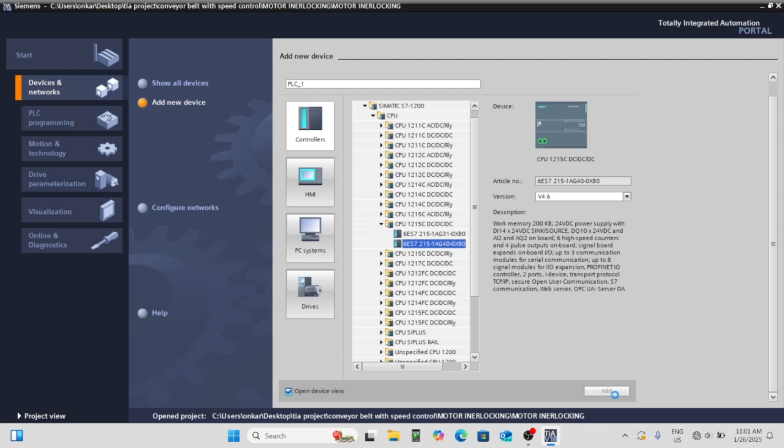After adding the PLC, make sure to set up the security configuration to ensure proper operation and safety. Next, add a new HMI screen to the project and establish a connection between the HMI and the PLC by configuring the communication settings.

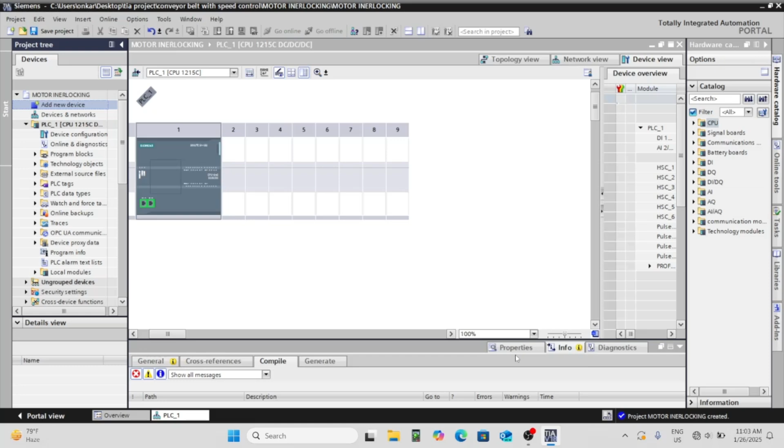Now go to the default tag table, where we'll create the necessary tags. Add tags for inputs like Start Motor 1, Stop Motor 1, Start Motor 2, and Stop Motor 2. For outputs, create tags for Motor 1 and Motor 2. With the tags created, navigate to the OB1 file, where we'll design the ladder logic.

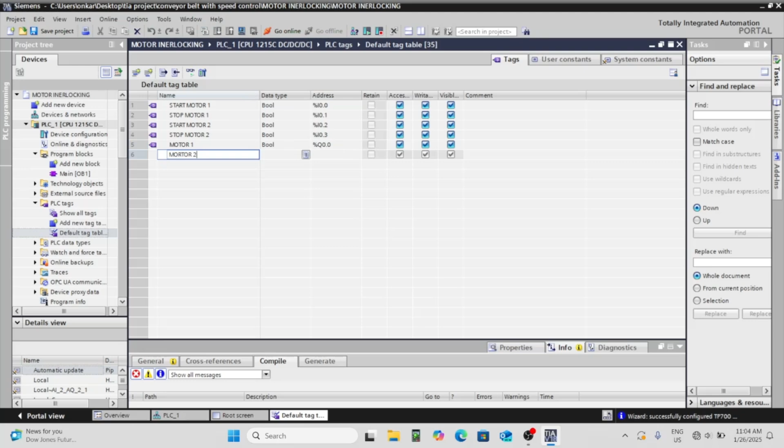In Network 1, configure the logic for Motor 1 by adding a Start button, a Stop button, and the Motor 1 output, ensuring it latches properly.

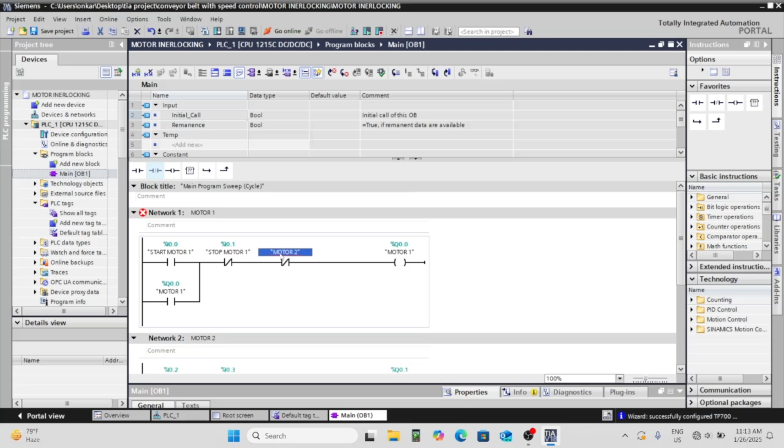For Network 2, set up the logic for Motor 2, but include an interlocking mechanism. Add a normally closed (NC) switch between the Stop button and Motor 2 and assign it the tag for Motor 1. This ensures that Motor 2 cannot start if Motor 1 is already running, achieving the interlock.

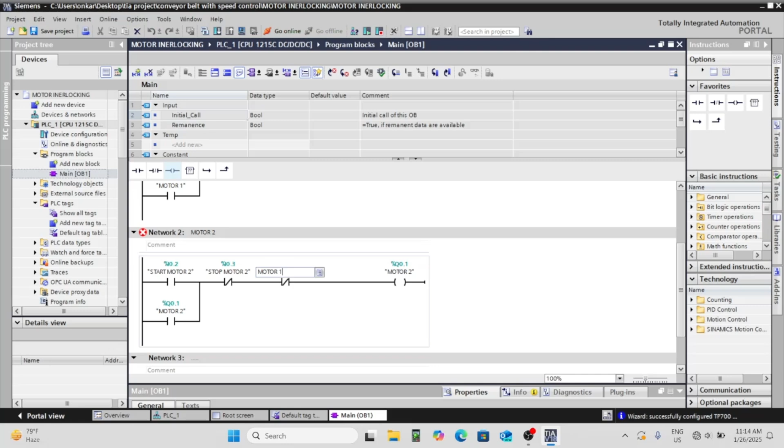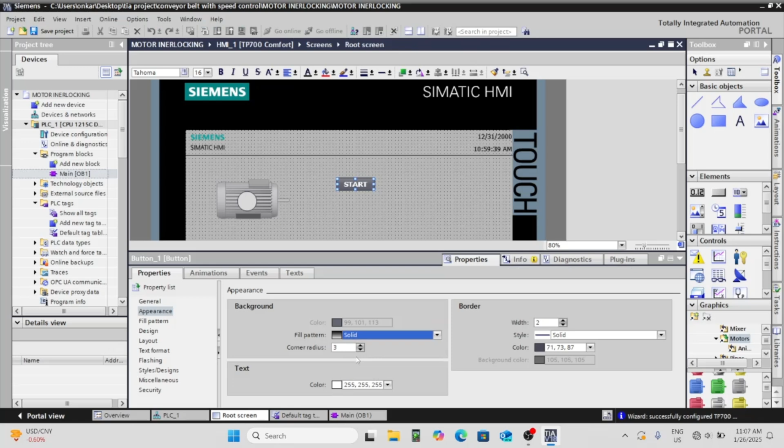Once the ladder diagram is complete, move to the HMI screen. Design the interface by adding buttons for Start and Stop for both motors. Assign the respective tags to each button. Customize the appearance by changing the button colors and adding events.

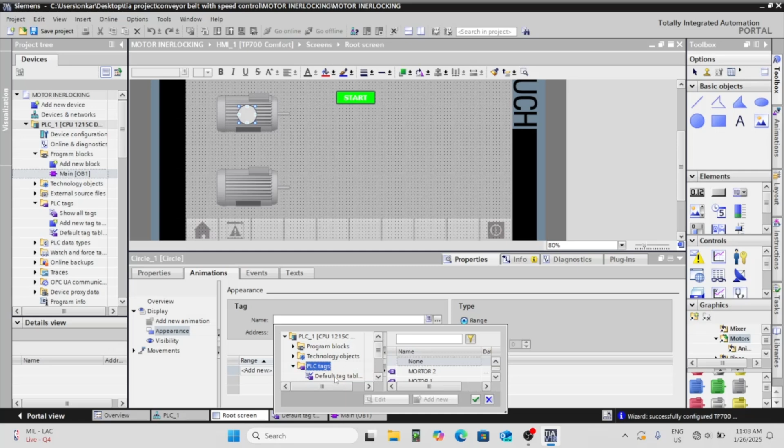Configure the Start buttons with Set bit on press and Reset bit on release, and the Stop buttons to stop the motors. Copy and adapt these settings for Motor 2. For indicators, add circles on the HMI screen to represent the motors. Use animations to change their colors based on the motor's status, toggling between two colors for on and off states. This visual feedback will make the HMI user-friendly.

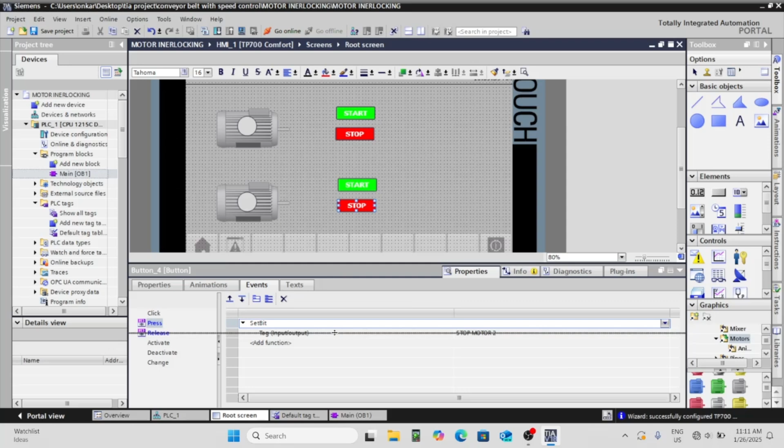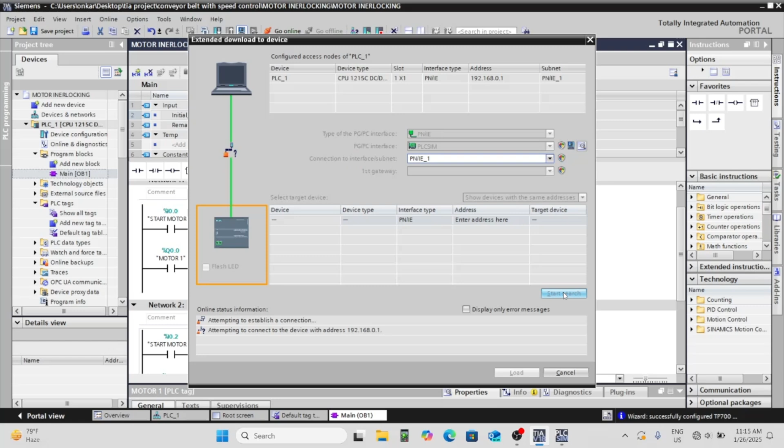After designing the HMI, go back to the PLC program and start the simulation. Connect the server for the HMI simulation and verify that everything works. Test the functionality by pressing the start and stop buttons on the simulated HMI screen, observing the motor status indicators, and ensuring the interlock works as expected.

With that, your program is ready. This approach demonstrates how to effectively interlock two motors in a PLC using TIA Portal, ensuring safety and precise control.